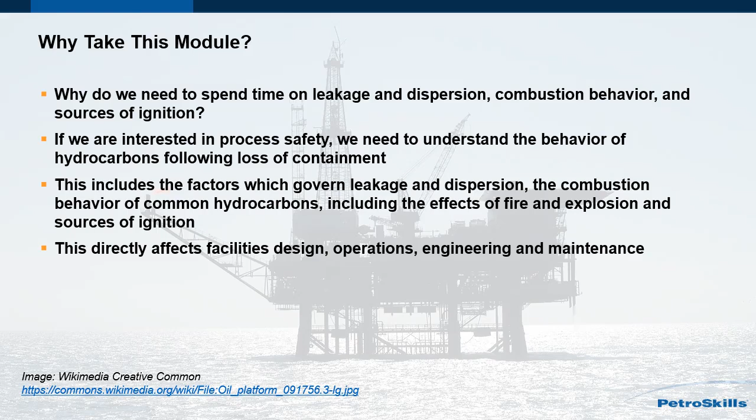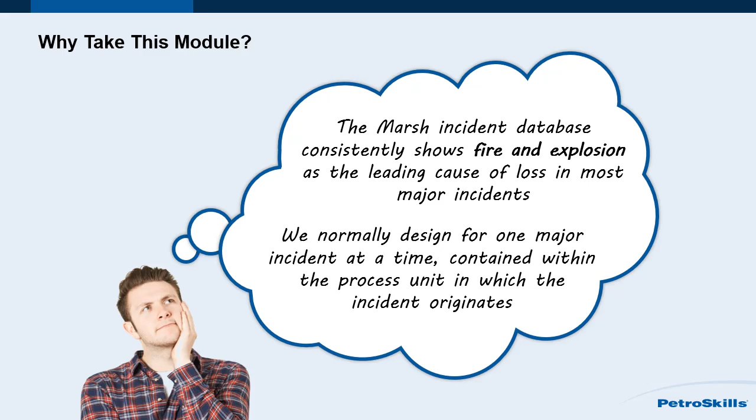The Marsh Incident Database, published every year, consistently shows fire and explosion as the leading cause of loss in most of the major incidents. We normally design for one major incident at a time, contained within the process unit in which the incident originates. If we fail to contain the incident, it will escalate into a major incident, which is unlikely to be readily controllable.

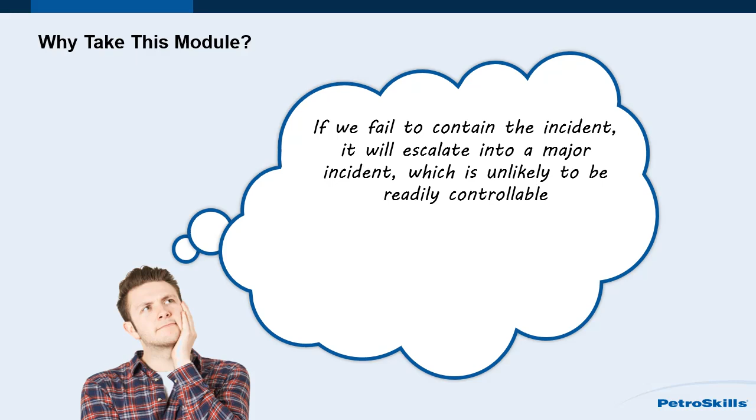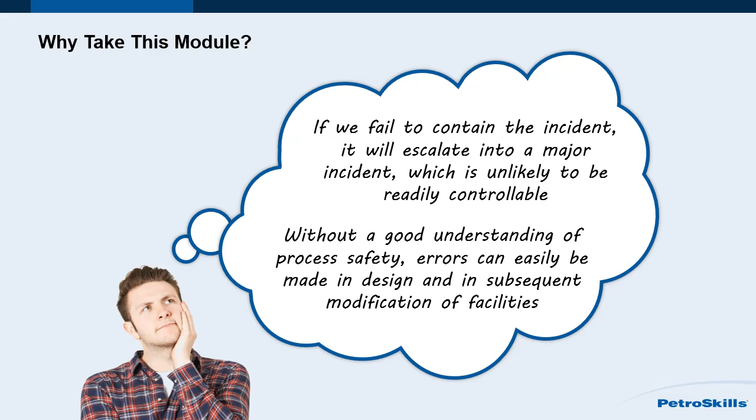Without a good understanding of process safety, errors can easily be made in design and in subsequent modification of facilities. Our understanding of process safety also affects how we operate and maintain our facilities and how we respond to emergencies.

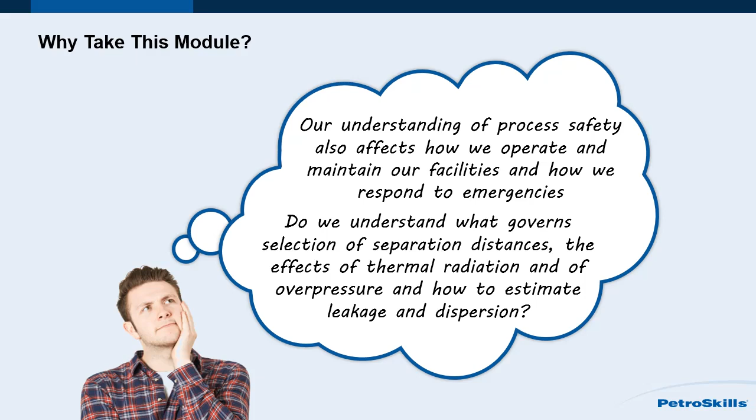For example, do we understand what governs selection of separation distances, the effects of thermal radiation and of overpressure, and how to estimate leakage and dispersion? Do we have a useful understanding of sources of ignition, including some of the less common sources? How can we identify deficiencies, particularly in older systems that may or may not meet current standards?

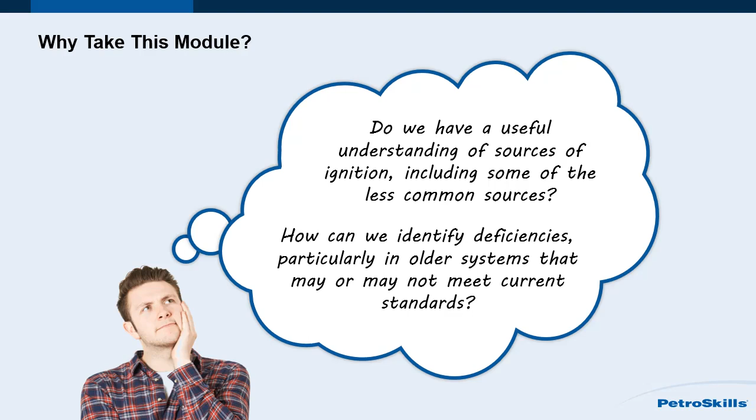Facilities engineers and project management personnel often have broad responsibility for technical decisions that affect the long-term process safety of hydrocarbon facilities. While many companies have specialist support available, those resources are usually available on specific request rather than for routine work. Without a basic understanding of the subject, we may not know when to call in a specialist.

This module is at the fundamental level, building on the material covered in the core modules. There are some quantitative calculations to work through as you learn the concepts. Although very good software tools are available, relatively simple calculations can often be useful, particularly in the early stages of a project before we have sufficient data to support a good model, and also in existing facilities as a screening tool to guide us as to where detailed models are needed. It is a useful development step from which you can progress as you need increased competency in the subject.

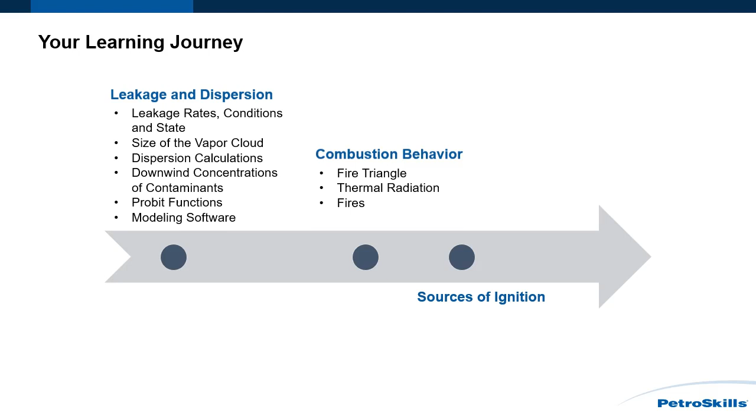The 3 lecture sections in this module are leakage and dispersion, combustion behavior of hydrocarbons, and sources of ignition. In the leakage and dispersion section, we will discuss leakage rates, conditions, and state, size of the vapor cloud, dispersion calculations, downwind concentrations of contaminants, probit functions, and modeling software. In the combustion behavior section, we will discuss fire triangle, thermal radiation, fires, and explosions. In the sources of ignition section, we will discuss electrical area classification, lightning protection, and flame arresters.

There will also be 2 live virtual sessions that give you the opportunity to share lessons learned from the application of what you have learned in the example facility and ask questions about the module so far.

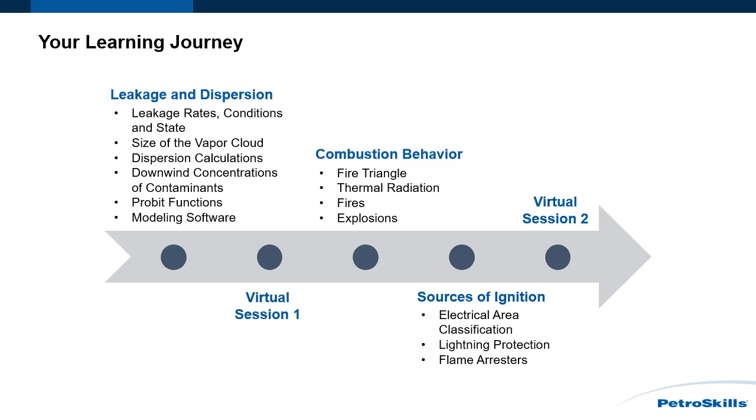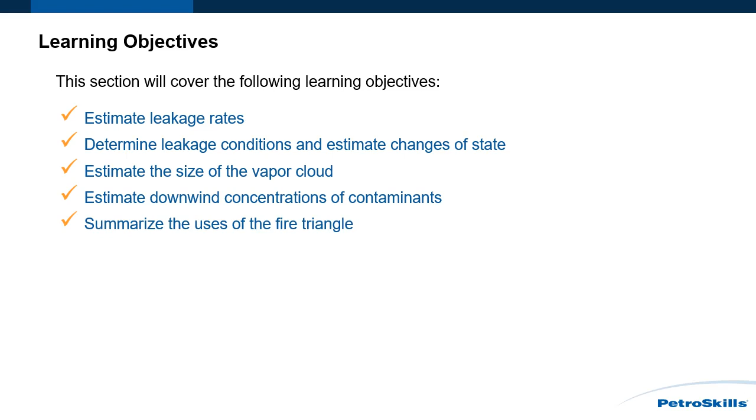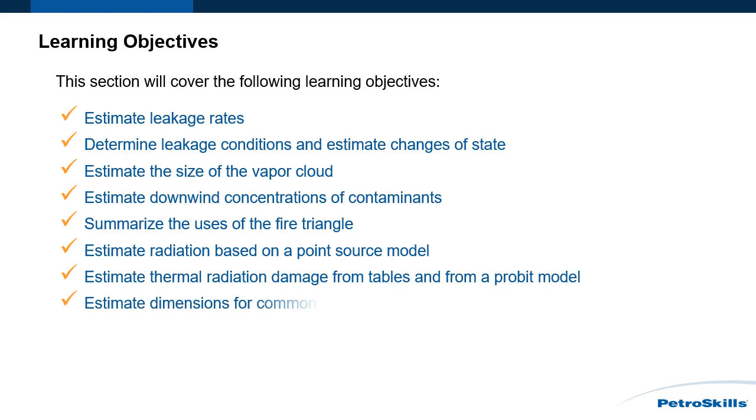This module will cover the following learning objectives: estimate leakage rates, determine leakage conditions and estimate changes of state, estimate the size of the vapor cloud, estimate downwind concentrations of contaminants, summarize the use of the fire triangle, estimate radiation based on a point source model, estimate thermal radiation damage from tables and from a probit model, estimate dimensions for common types of hydrocarbon fires, explain what circumstances would justify advanced methods of calculating overpressure and uses for the results.

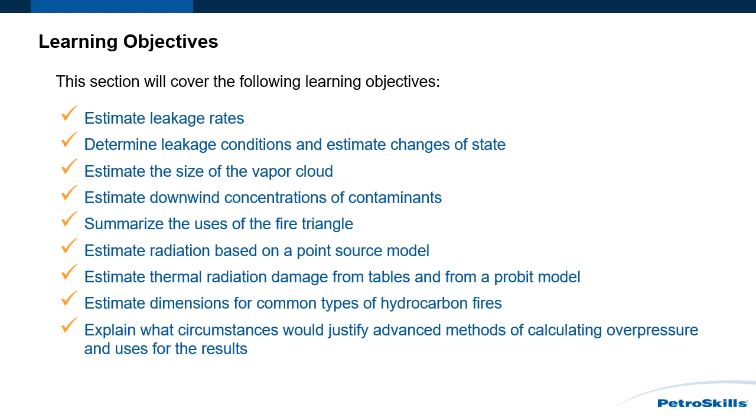Explain uses and principles of electrical area classification. List lightning protection alternatives, using protection of a fixed roof tank farm as an example. Explain how flame arresters work, and identify the strengths and limitations of flame arresters.

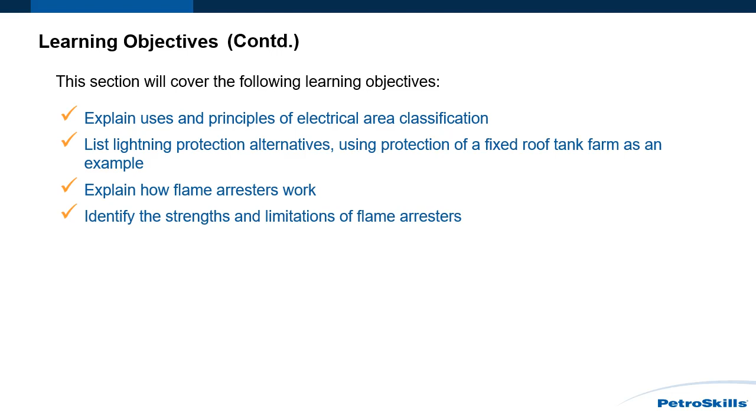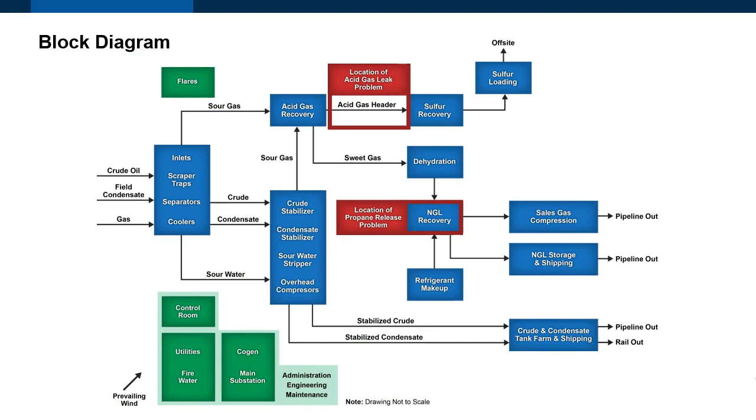In this module, we will work on exercises based on an example facility. Shown here is a block diagram of the example facility. A downloadable PDF version of this block diagram is available in the Additional Resources section. Details about the facility are provided in the PDF.